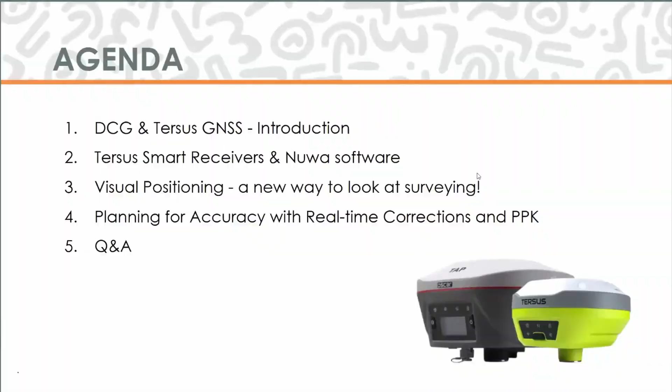A quick introduction to Desert Creative Group. We are the Tersus master distributor in the United States and Canada. We bridge a gap between distribution, sales, and supporting their cutting-edge GNSS and positioning technology, and providing geospatial strategy and consultative GIS services to ensure your success along the way. Our team has over 100 years of combined expertise supporting customers with field data collection, spatial data management, and analytics. We support you by training, consulting, and helping you solve complex challenges with spatial data and simplifying workflows.

Tersus GNSS provides high-performance, cost-effective positioning solutions for industries that rely on precision. By combining advanced GNSS technology with accessible pricing, they help customers achieve centimeter-level accuracy without the traditional barriers. Tersus has a large global ecosystem of trusted partners and geospatial innovators driving success worldwide. Agile, user-driven solutions, proven in the field, shaped by real-world user feedback.

Thanks, Jake. Well, our focus is on the Tersus GNSS Smart Receivers. It's important to see the full scope of capabilities that they offer. With a full geospatial portfolio, it allows us to support a wide range of industries.

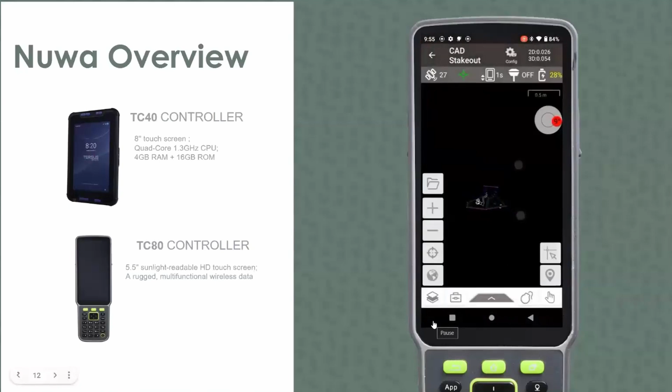Notice some of the other things in our survey tab revolving around stakeout, working with surfaces, roads, and CAD files. If I go into CAD files, you notice we can load up a DXF map, and this is now interactive for us, so we can select lines, points, whatever we want, and work with those.

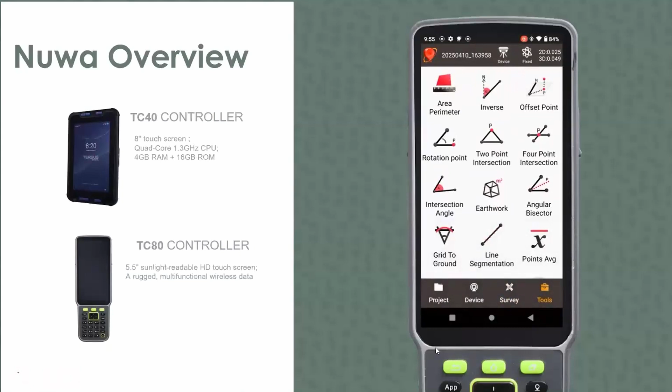Looking at our last tab, this is where we'd see a lot of our COGO-based tools, calculations, area division, any of those types of things are all in our tools tab. So that's just intended to give you a little bit of an overview of what the Nuwa software looks like.

The next thing I want to show you is what I'll call the AR stakeout. When you first start off and you're going to select something to stake out to, you'll notice your information on the screen. Depending on your background map and some settings, you're going to have some pretty standard information for staking things out. On the left side of the screen, if I click that little AR button, this will change my display on the screen of the controller. Essentially, it gives a digital arrow overlay over your real-time image, helping you stake out more efficiently.

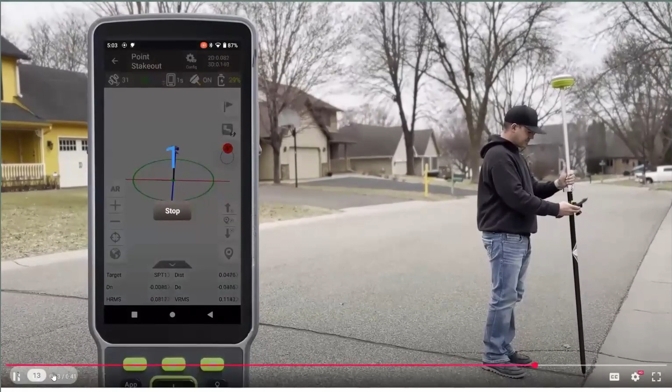Now we'll jump into the GNSS receivers. Tersus develops our own GNSS boards and solutions from scratch, following their core philosophy of build better or don't build it at all.

Starting off with the Luka. The Luka is our palm-sized, lightweight, and rugged GNSS receiver. It features the Extreme RTK engine, which allows for all available constellation tracking. That's going to make it so that working in more challenging environments, it performs better, and even gives you faster initializations, giving you the ability to use GNSS in more conditions.

It has an integrated IMU, which means you can take measurements unleveled and in hard to reach areas, like you see on the right. Maybe that's not your traditional shot you're taking, but it works great for that. This IMU is immune to any sort of magnetic disturbances, not needing to do any calibrations or have any limitations on how far you can tilt it.

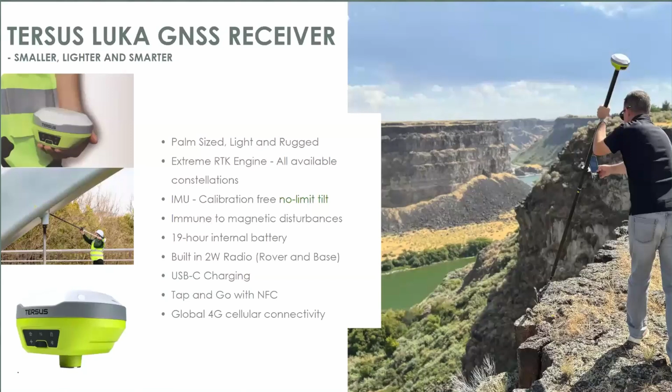It has a 19-hour internal battery, which is recharged using USB-C, a built-in 2-watt radio for receiving or transmitting in base or rover mode. And you saw in that quick video, this does have the tap and go with NFC connections, and it also has a 4G cellular connectivity option.

The next one is the Tersus Oscar. The Oscar, like the Luka, has extreme RTK, tracking all available constellations, and a built-in radio. One unique feature to this one is it has a control panel on the front, as you can see. This allows you to change some settings, maybe start some measurement features or capabilities that you want, change the radio channel, whatever it might be.

A lot of these settings are accessible on the front display without having to get your controller out. This one also has the IMU, which is immune to magnetic disturbances and doesn't need calibration. It features an 8-hour battery that is hot swappable, giving you a little bit more flexibility there. This one does have the NFC connection and 4G cellular connectivity.

In a minute, Jake's going to tell you about what TAP is. This one supports TAP, which is a satellite-based PPP solution. I'm excited to hear about this in a few minutes. The last thing I'll mention about this receiver is it gives some of the best performance in more challenging areas, just in how it's built and the technology that's in it.

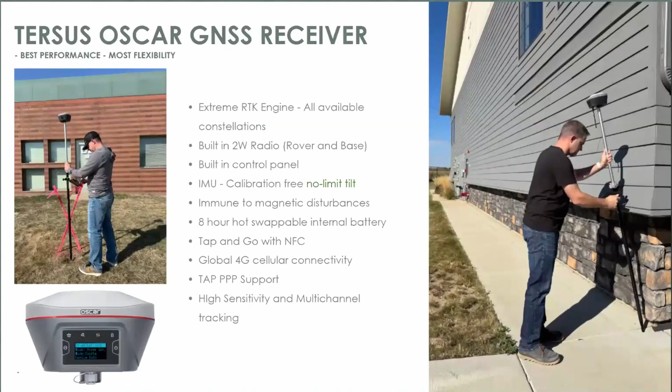So this topic here, visual positioning, this is one of our, seems like a very hot topic of people wanting to know more about. So I'm going to give you a little bit of a look at how visual positioning works.

This receiver, the Tersus Oscar Trek, is unique in that it has a camera on the side of it, allowing for capturing imagery while we're in the field. Essentially, this is being processed in real time on the tablet or controller you're using to extract out positions and coordinates in near real time. No post-processing needed, giving you 2 to 4 centimeter accuracy. Sometimes this is just really nice for that hard to get point, or painting a picture of what it's like in the field for people in the office.

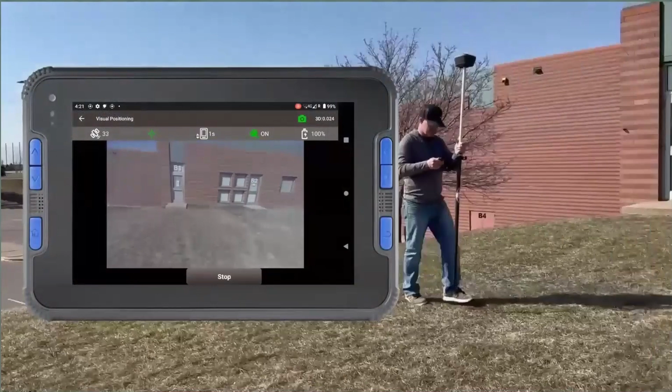So how does this work? I'll give you a little bit of an idea of the workflow. In the field, you go into the visual positioning routine and hit start vision. You simply start walking along. As you're walking, you're focusing on your controller screen just to make sure the camera is covering what you want, or an area that you're going to be extracting measurements from.

Maybe you want to aim it up a little bit for a higher building, or aim it down at the ground, maybe if you have a trench or some groundwork that you know you're going to want to focus on getting more information.

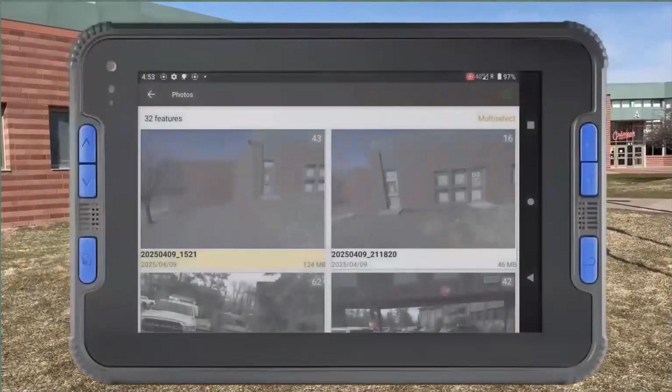At the end of this walk, you hit stop, and it's going to store all the photos in a folder. So while we're still in the field, we have the ability to look at the different groups of photos. This last walk that I just did had 43 images.

Still being in the field, I have the ability to do four different ways we can extract data out of those photos: quick survey, sparse point cloud, advanced survey, and dense point cloud. The advanced survey and dense point cloud is a newer feature. First thing I'm going to show you is how we do a quick survey.

So for quick survey, simply go into the group of photos we're working in and select that. Pick any one of the photos out of this group where we know that position is at.

Tap on the screen in the area where you want to measure, and it will zoom in, giving you a magnified view to make sure you can click more precisely. Simply hit measure on the screen. You see the residuals in the upper left, and you're done. If you want to store that in your job, you're ready to go.

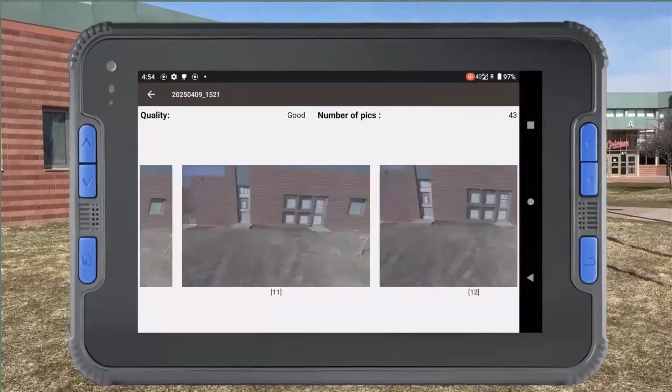The next thing I want to give you a quick peek at is creating a dense point cloud. Similar deal: go into the group of photos, select the area you want to work.

On the right side of the screen, once you've selected a photo, there's this lasso icon. You're going to draw a circle on the screen, giving it an area of where you want the software to extract out that data. In this example, it's probably 1.5 minutes to extract out a point cloud.

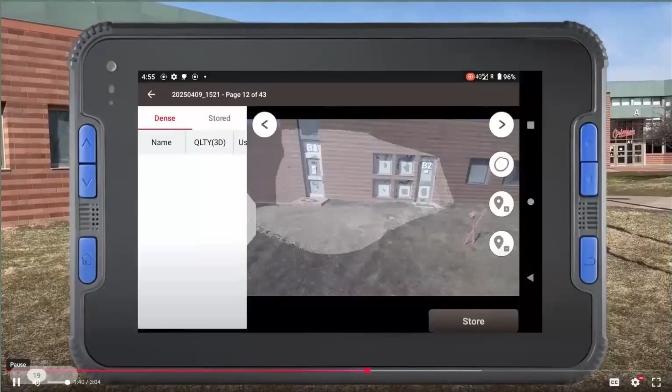It gives you a grayed out view on the screen, indicating we've built a 3D point cloud here. So in the back, on the left side of the screen, that's actually a wall that's maybe 40 or 50 feet back. It got some data back there, some of this here.

And if you want a larger area, you simply draw a larger circle, or pan through the photos a little deeper down the list, and you can create more point cloud information.

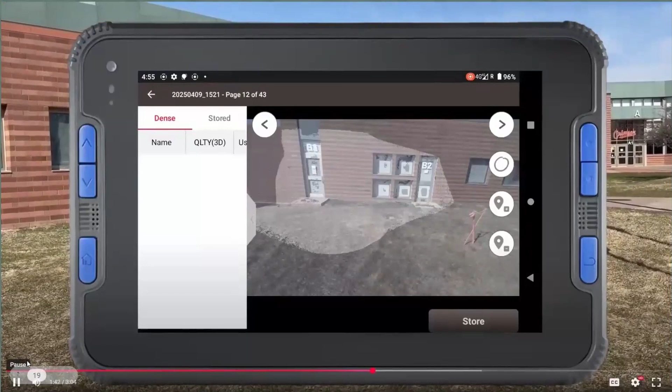The next one I want to show you quickly is to do an advanced survey point. Advanced survey points have a workflow very similar to the first one I showed you. But what this is doing is it's more accurate, because now if you have a point cloud and the photogrammetry, it's using both of those, all of that information, to create a higher accurate point.

Select where you want. You can select as many positions on this single photo as you want, and you can review the information on the left side of the screen, making sure it's what you want.

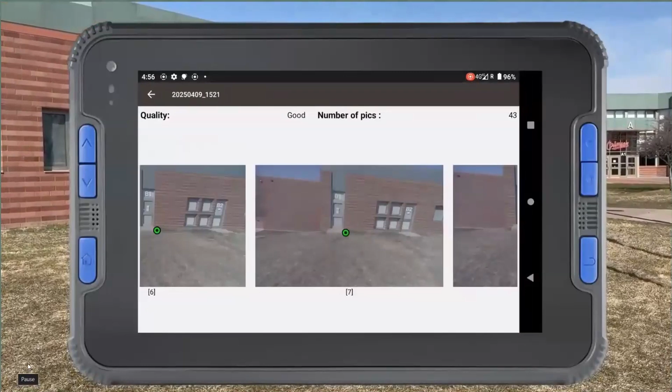If that is what you want, to store that in your job you hit store, give it a code and a number, and hit OK. And that is now all stored in your job.

Pausing for a second here, the data that we captured on our controller and extracted, point clouds, any of that stuff, we can simply drag that into your favorite processing software.

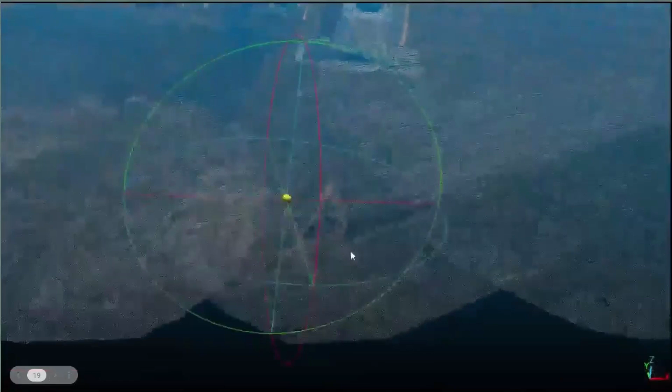In this scenario, I wanted to look at what the point clouds look like. So this is just intended to give you an idea of what point clouds from the Oscar Trek receiver look like in a 3D environment. As you can see, it's pretty good. We typically tell people to keep within 50 feet for optimal performance.

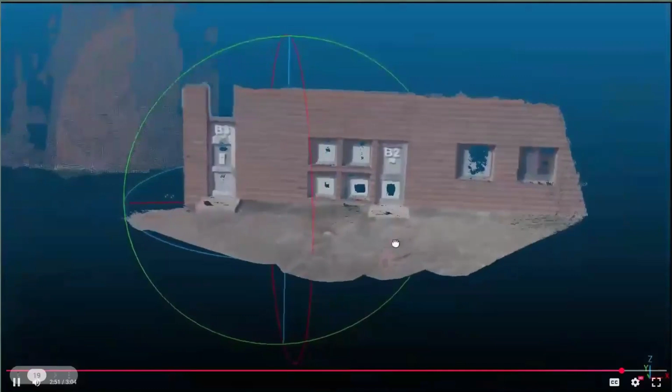Up next, we're going to have Jake talk about planning for accuracy with real-time corrections and PPK.

Thanks, Dustin. Yeah, planning for accuracy and looking at real-time corrections and PPK. So how do we overcome some of the challenges with high accuracy positioning in the field?

Whether that's working in remote environments without real-time infrastructure access, or working with a mixed fleet of devices. Maybe we're working with something that requires a radio. Maybe we're working with something that requires NTRIP. Maybe we have a solution where we don't have any infrastructure.

So we don't even have real-time corrections. Maybe there's no cellular data or connectivity available. We're working across the country or globally. So the challenges of finding correction sources might be a challenge. Also, variances in real-time reference frames.

So if we start looking at how do we solve some of those solutions, Tersus offers flexible solutions to help you get the job done more efficiently. Both the Luca and the Oscar Ultimate, as well as the Oscar Trek, support rover mode, so we can capture points, lines, polygons with the newest software and store that information. But these receivers are capable of a lot more.

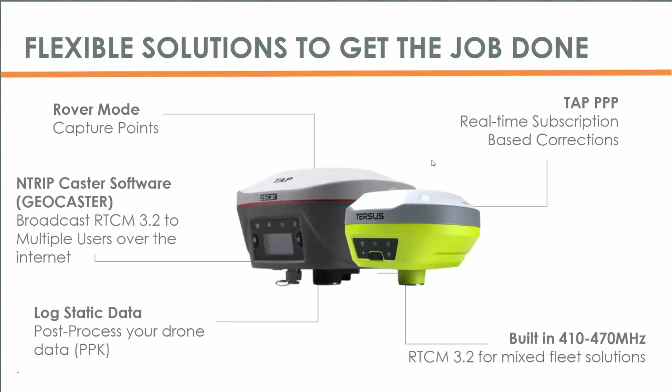But first I want to talk about the Tersus Geocaster. This is available to all users with a Tersus Smart Receiver, such as the Oscar or the Luca. It includes the ability to configure your receiver as a base station and easily broadcast real-time corrections to a rover. Think about it for machine control, maybe an RTK-capable drone, but anything that can get NTRIP corrections, you can broadcast to from your Luca or your Oscar receiver.

They have a hosted cloud service that allows for this to easily push corrections from your receiver to their cloud-based Geocaster software and allow for a multitude of different applications to receive the corrections. Again, RTCM and CMR protocols are supported.

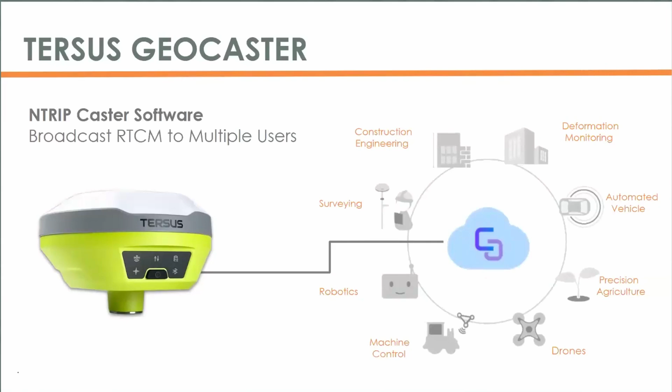If you need something more permanently set up than your smart receiver, Tersus also has the GeoBee solution, which consists of their David 30 GNSS receiver and an NTRIP modem. The benefit of this is the modem broadcasts corrections through the internet via Wi-Fi. It also has a SIM card slot, so you could pop in a SIM card and have 3G and 4G connectivity.

You can connect to it via Ethernet. This helps with redundancy and stability in the event one of your communication networks goes down. We've had customers actually want to connect up things such as Starlink for remote applications, which can all be done through the Ethernet port or through Wi-Fi.

So similar to the Geocaster software with the smart receivers, users can easily set up a permanent base without the supporting infrastructure required, such as a server and a static IP, because it's all cloud-based. 20 users can access this cloud-based solution at once.

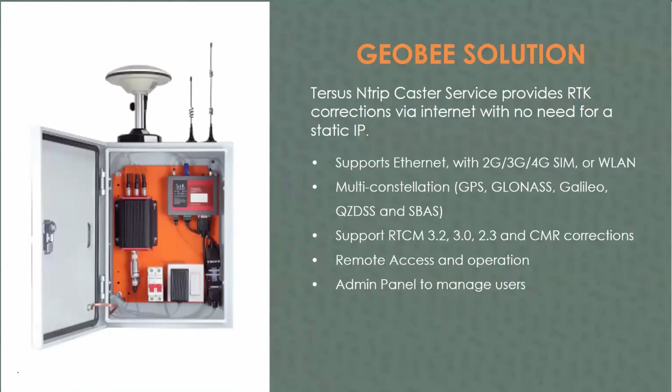So if we look at the management of this solution, there's an admin panel for configuring the users. You can configure things such as usernames, passwords, set the expiry date for users, so if you want to set a limit on that, or even set the limit of the number of days that a user can access the corrections through the Geocaster. You can set that, and then you can also set how many people can log into a specific account at once using the same credentials.

This is a great option if you're working in the same general area with stable access to the internet in the field and need corrections day in, day out. But let's say that you're working in an environment that doesn't have stable connection to the internet. Well, that's where Tersus's advanced positioning TAP service comes in.

If you're looking to work in more remote areas or across a wider footprint, like say across the country on different projects, their PPP, which stands for precise point positioning solution, is different than a traditional RTK correction, as it does not require you to set up a base. Actually, it's a system developed by Tersus to provide real-time corrections via L-band geostationary satellites, which can achieve 1.5 centimeter of horizontal accuracy very quickly.

Convergence times to achieve that is generally less than 3 minutes. Again, this is a global system, and in most cases globally you'll have at least 2 L-band satellites broadcasting corrections at once. This is a subscription-based model, which allows you to easily achieve high accuracy without the headaches of setting up a base station.

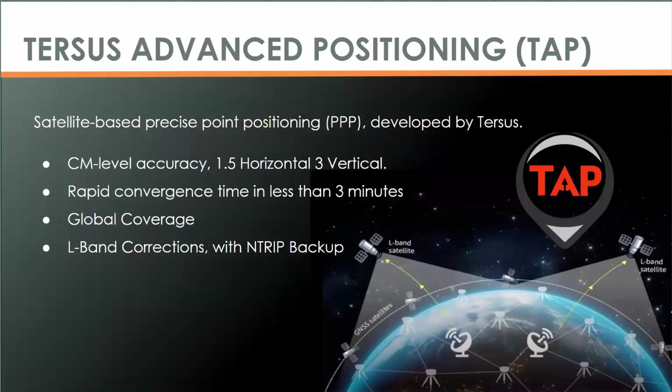Next I want to talk about a traditional workflow. If we look at a GNSS workflow priorities of a professional drone user, they may need to be able to use this receiver for capturing ground control points. They may need to be able to set a base coordinate for initialization, whether that's capturing that and creating an NGS solution, or maybe they want to set up and capture a position for a base coordinate using the PPP solution.

Maybe they need to use NTRIP corrections for a drone. Maybe they need to post-process their data after they've flown it. Maybe they need mixed fleet compatibility because maybe they have different types of drones. Maybe after their project's completed, they want to go out and do accuracy validation of the work that they've done.

So they want to take this out and stake out some points or do some checkpoints in validation.

One of the nice things is that these receivers are adaptable to really any field task. You can capture data as a rover, broadcast real-time corrections, or log static data. There's flexibility built in so that if you're working in the field without internet access but have two receivers, you could set up a base-rover combination via the radios. Or if you just have a rover only, you could use their TAP-based PPP subscription service and allow for high accuracy in the field.

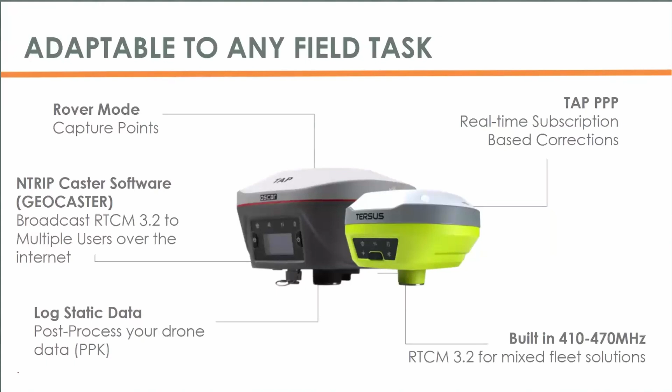One of the first questions is about the stated accuracies from the 2 to 4 centimeters around visual positioning. Those specifications are based off of your core position from your GNSS solution. So if you're using a network solution or a base, how far away your baselines are, your positioning accuracy in the field, along with how far away the object or subject you're measuring is, that's kind of where you're going to get that range. Hopefully that helps a little bit.

We have one more question around how much do the receivers cost. Well, without getting too much into the details, any of the receivers highlighted here are in between $8,000 to $12,000.

I have a question around the Nuwa software. Can I run the Nuwa software on my Android phone? Yes, you can run that. It's a free app download from the Tersus website, and it doesn't have any fees to use it, annually or anything like that.